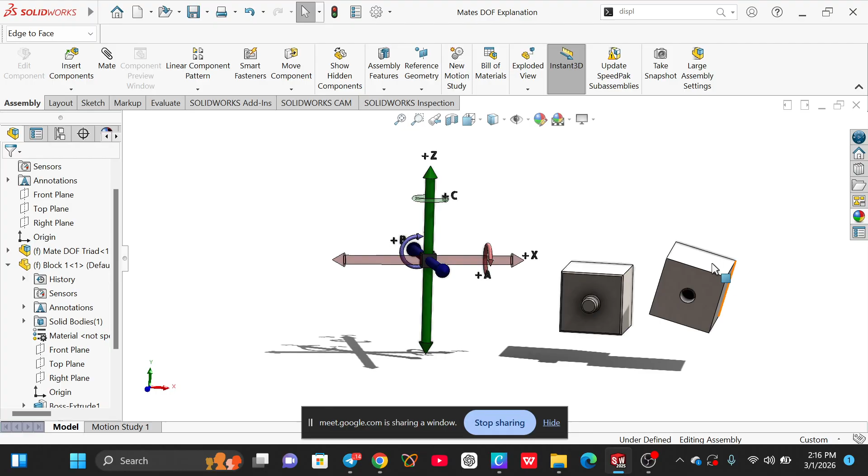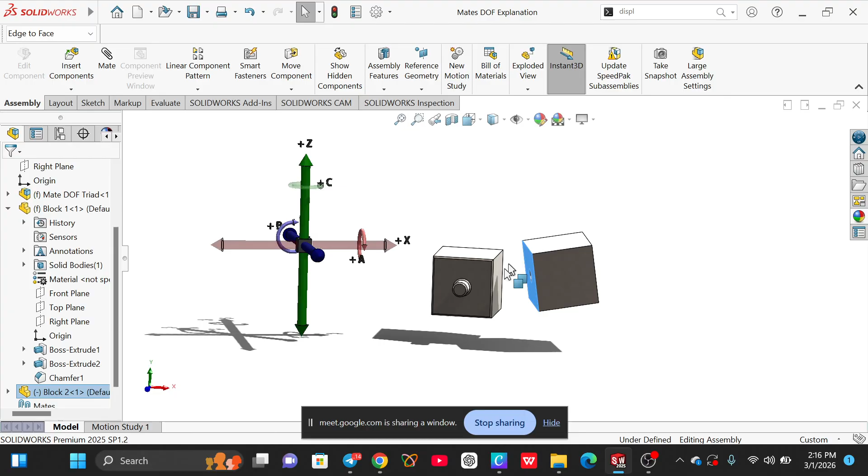Now, as far as mates go, I want you to picture mating as more like real life. So I go to my mates, and I'm just going to briefly explain so we don't take up much time. Like I said, standard mates.

For standard mates, you have coincident — basically joining two faces or two edges together makes it coincident. Then we have parallel, which keeps them at the same line; they all share the same heel or the same angle if it's at angle 90. One of the parent mate and the child mate, one of them turns and now mimics the position of the other. Then we have the perpendicular — basically how perpendicular works is a line should be at angle 90 to the horizontal or vertical line it's being perpendicular to.

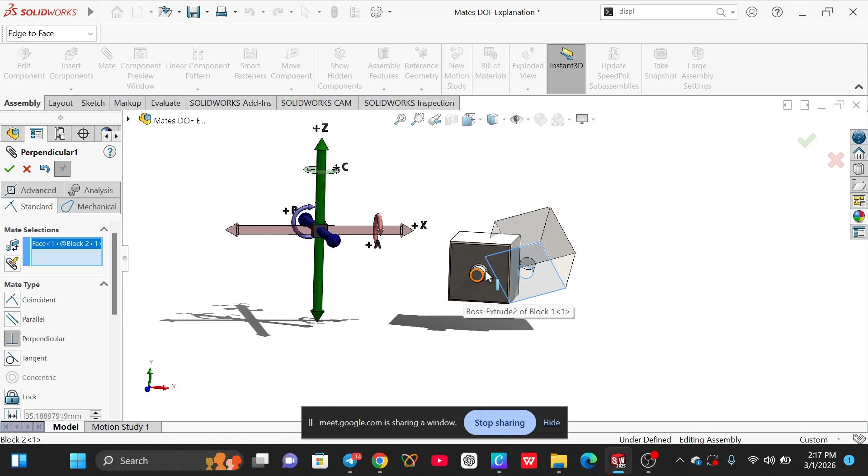Then we have tangents — tangents are for circles and edges, or circle and cylindrical surfaces. That's for tangent. Then concentric is for two cylindrical bodies.

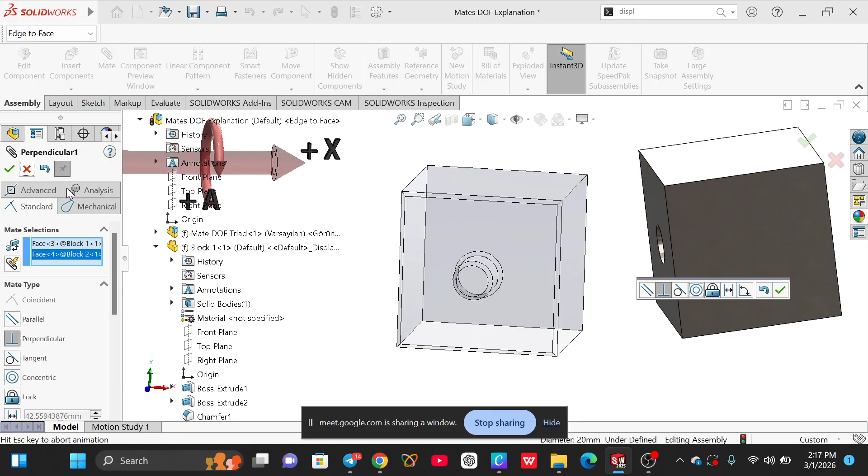So perfect, that's just it. At the base level, there isn't too much to it, because it's a matter of choice — since how you assemble a certain part or product is based on whatever it is being applied to, you have the prerogative to do whatever you want with it. You can use any mating you want, as long as it's logical for that purpose. Okay, then now we move to the advanced mates.

These are basically the relationship between parts — advanced mates are mostly used between parts that are much more complex. Now, for instance, the most popular advanced mating we use out there is the width mating. The width mating is one of those mates that just keeps it in the middle — what it does is work with two parts and keep them at an equal distance.

Then same with symmetrical, but the only difference is that symmetrical works with only planes. So symmetrical basically means you put your object, part, or component in the middle, at an equal distance from a certain plane.

Okay, then we have the path mate. Now, if you've taken the CSWP exam, you'll notice that at the end of the CSWP exams, the robotic arm—yeah, I think that's one of the most useful uses of the pathmate.

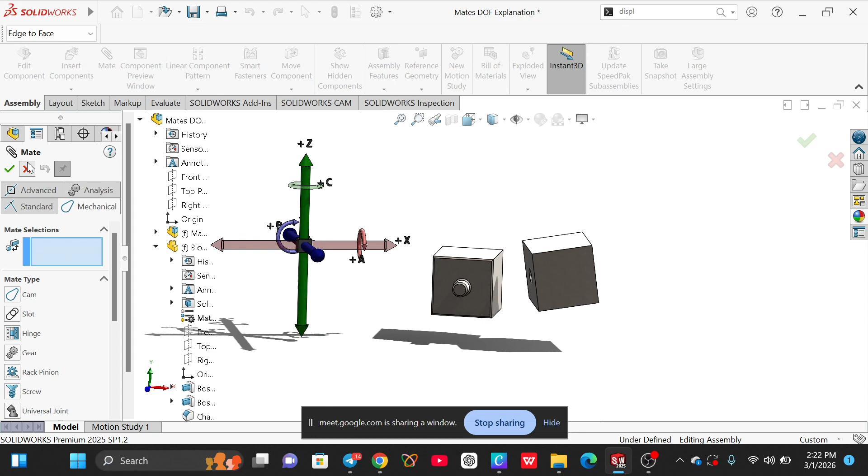So then, lastly, we have the smart mate. Now, when it comes to the smart mate, what it does is this: it anticipates your...

Sorry, give me a minute. Hello, can you hear me, please? Yes, yes, we hear you okay.

Alright, thank you. Now, the smart mate, what it does is this: at the most default level, the smart mate basically anticipates the best possible mating to be used for that said purpose. For instance, you bring two holes together, and the first thing that comes to mind, it ranks it—it's concentric rather than tangent, right? So it basically depends on what it's called, the smart mate. I assume I don't use it much because especially when you want full control of your design.

Then the last one is not really a mate. That's why I said there are four types of mate. So the MateXpert is more like a diagnostic tool—it helps you detect errors, when your design is over constrained or your design is under constrained.

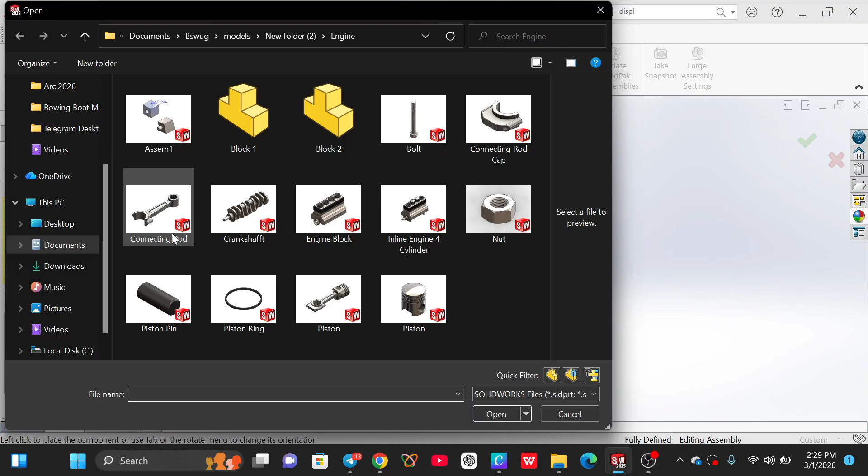So first things first, I insert my component, then browse through my components. Then I select the connecting rod. By default, this is fixed, so I right click and float it. Okay, perfect.

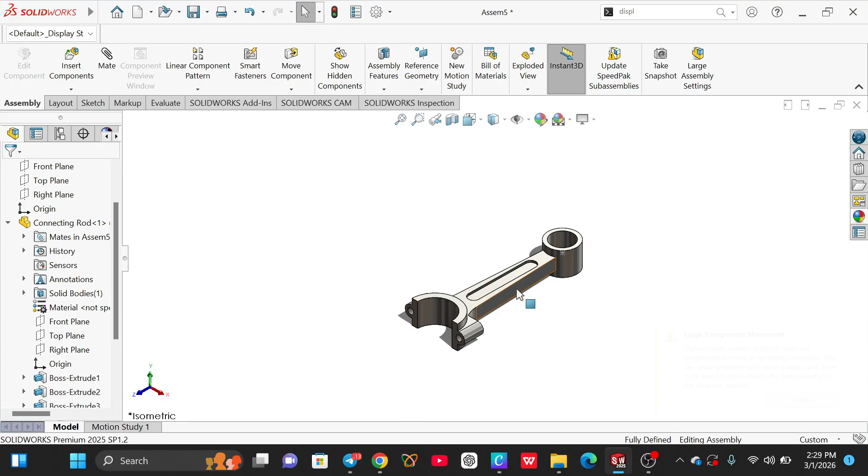Now it's floating. I said let's picture this like a workshop - our design shouldn't just be floating in an empty space. So what I do is make the origin of my design interface and the origin of my first part coincident. Doing this, my front plane or top plane of this part now aligns properly with the top plane and front plane of the assembly canvas.

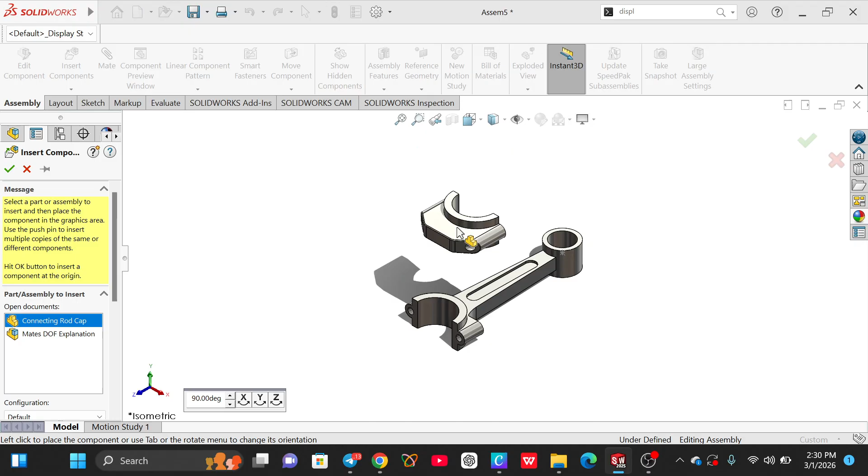Okay, perfect. Then I insert the connecting rod cap. Okay, then easily I take here.

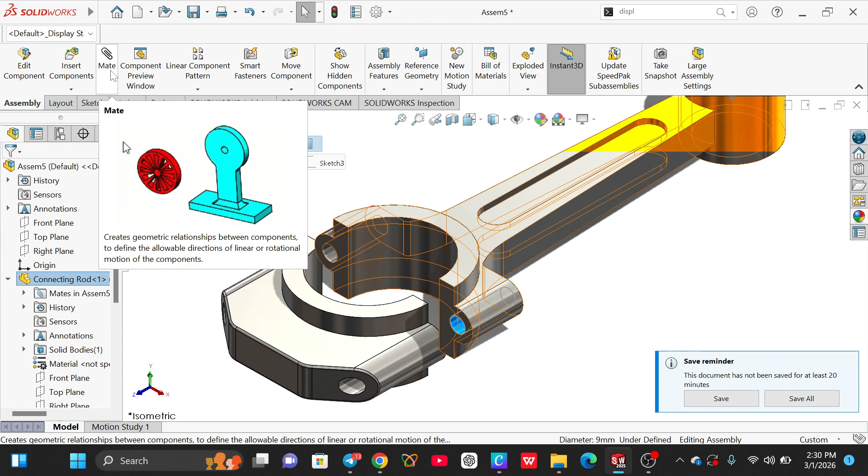Now, what I'm going to do is this - I'm not going to start using mate the normal way because it's going to take a lot of time. I'm going to click the part I want to mate, hold control, then select the second part I want to mate. Then the option for which mate I want to use - if you hover over them, you get to see the options. I think it makes my work much more efficient.

Okay, so here you have parallel, perpendicular, tangent - these are basic, standard mating. Then you now have advanced mating, these two. Good, so I make here concentric. Then I take here and I make here concentric.

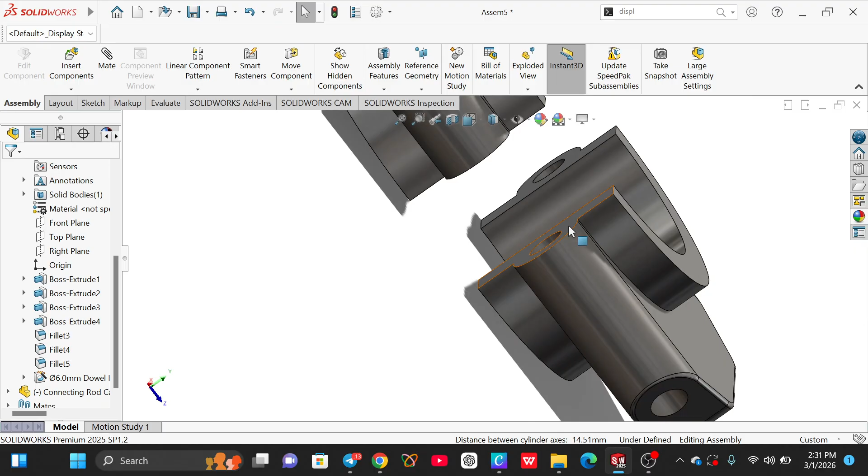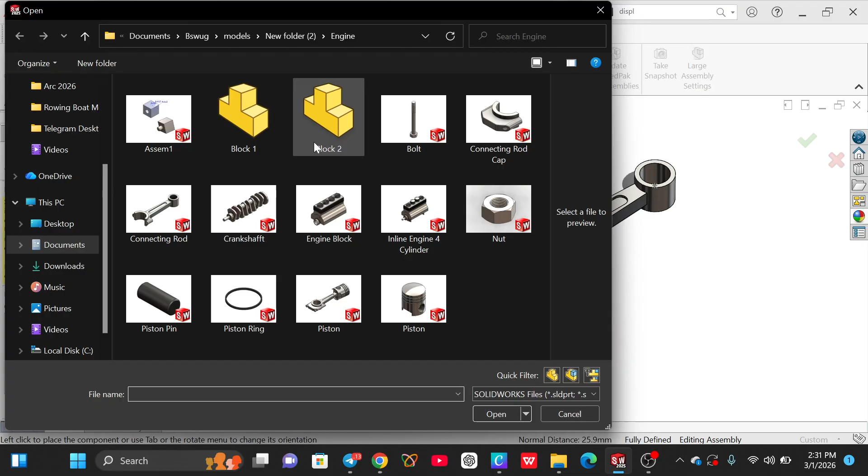Coincident, right? Good. So I insert the part. I insert my bolts, I insert my nuts. I'm selecting them so I can insert multiple components at once. I need the bolts, I need the nuts, then I need my piston, my piston ring, and my piston pin. Okay, so I open them and I start dropping them separately.

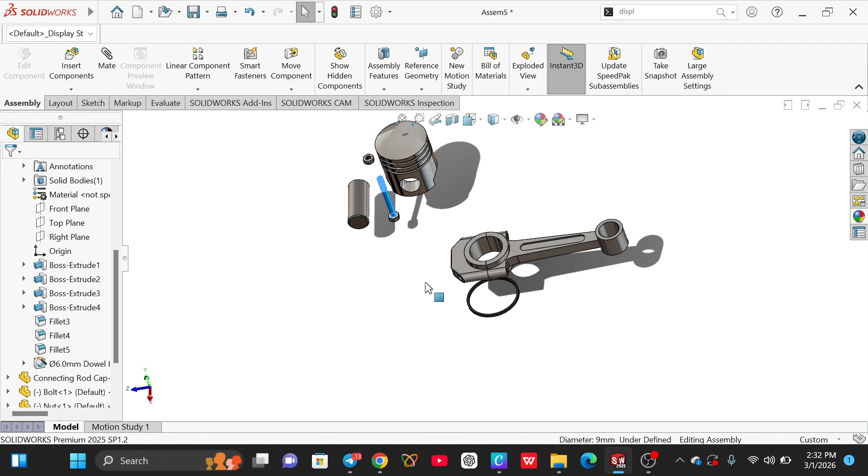Okay, good, perfect. So first things first is here. Okay, perfect. So I'm going to bring the nut closer.

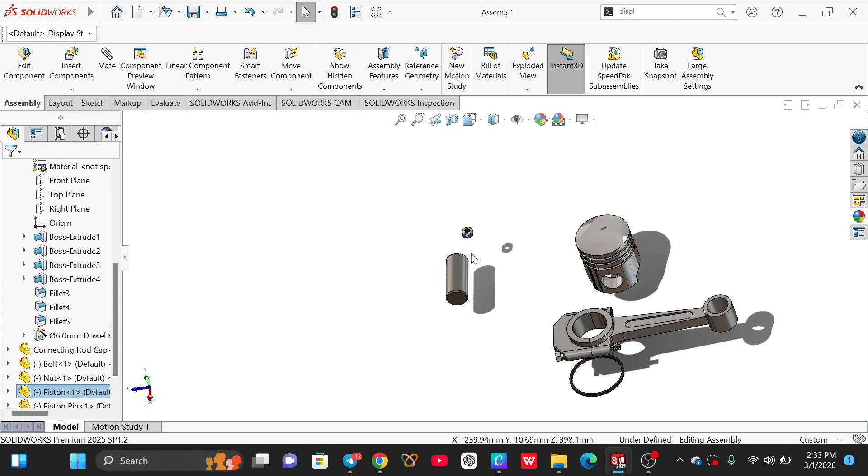Then, okay, first things first, I'm going to use here and here, and give it a distance of 10, right? Good. Then I'm going to apply.

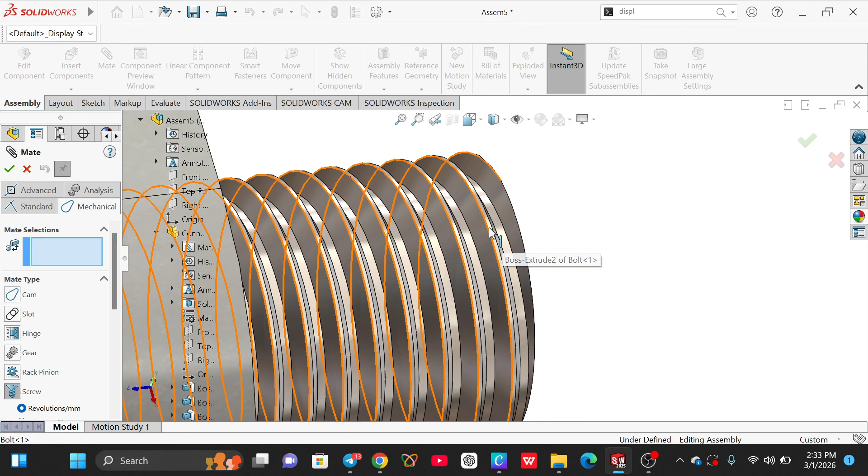Now, why I'm doing this is because I want to apply an advanced mate, right? So I'm going to go to my mate, select mechanical, and I'm going to select screw. So for the screw mate, I'm going to select this face.

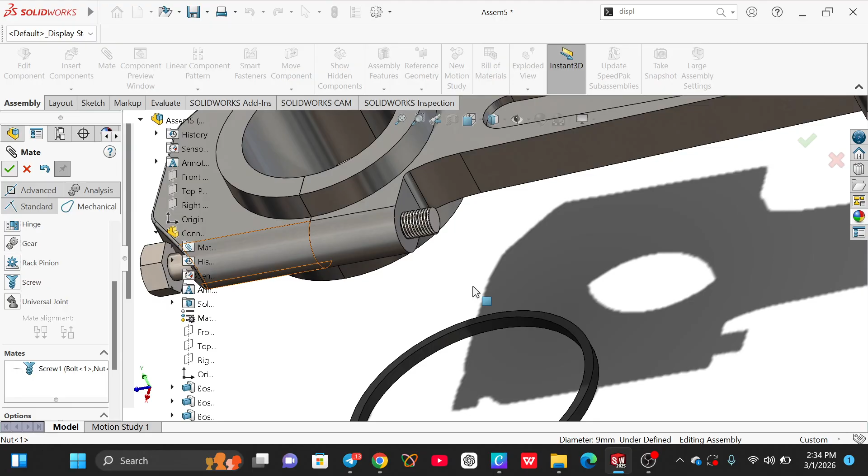Then in the nut, I'm going to select this face. Now it tells you the direction, so you have a whole lot of options, like how many revolutions per distance are covered and all that. So we're just going to leave them at default and say okay. Then I'm going to shift it.

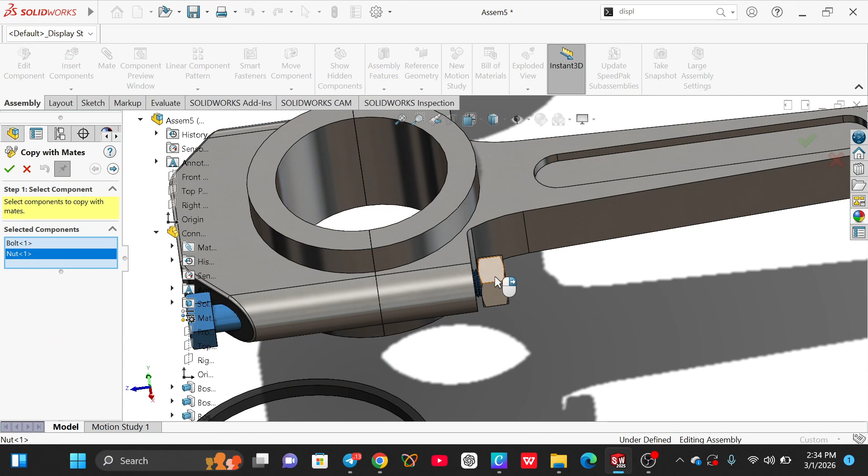Right, good. So before anything else, I'm going to right click this component and copy with mate. Then I'm going to select this set component too. Copy with mate makes your designing process much easier if you've used it before, right? Especially if you don't want to use linear pattern.

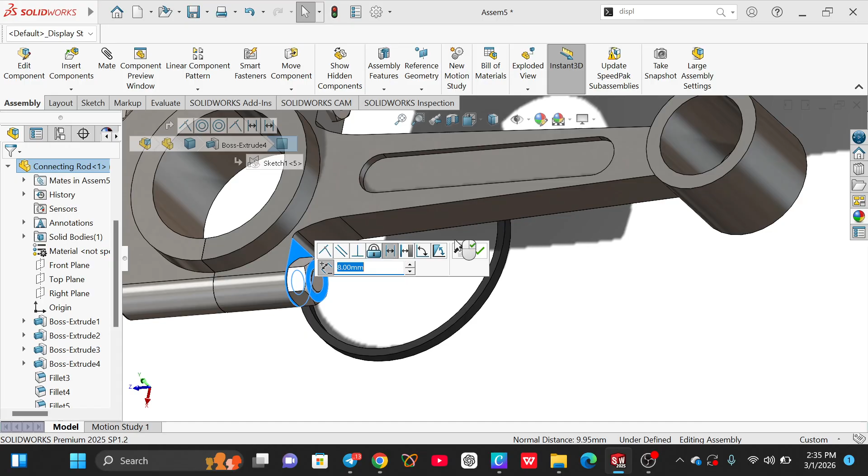Okay, good. Then cancel. So I'm going to make here and here at a distance of 8. Okay, good. Then I'm going to make here and here parallel. Sorry, coincident rather, they're already parallel. I'm going to make them coincident. Okay, good, perfect.

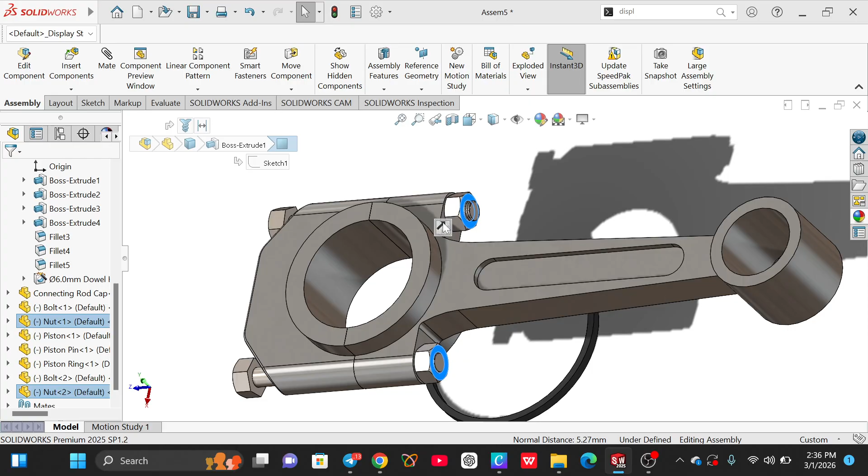Then for the piston, I'm going to add the rings. So if you're a mechanical engineer, I'm adding this ring. I want you to, in the comment section, tell me why as an engineer we need to add this piston ring. Why is this ring important in this internal combustion engine? Okay.

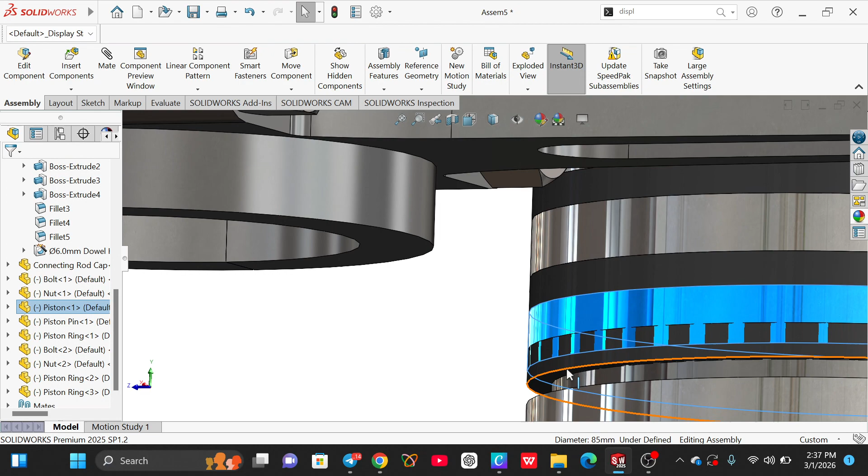Okay, all right, perfect. So all I have to do is take here and make here concentric. Then I'm going to take here, here, and here. And then I'm going to use the width mate and keep it midpoint. Good. Okay.

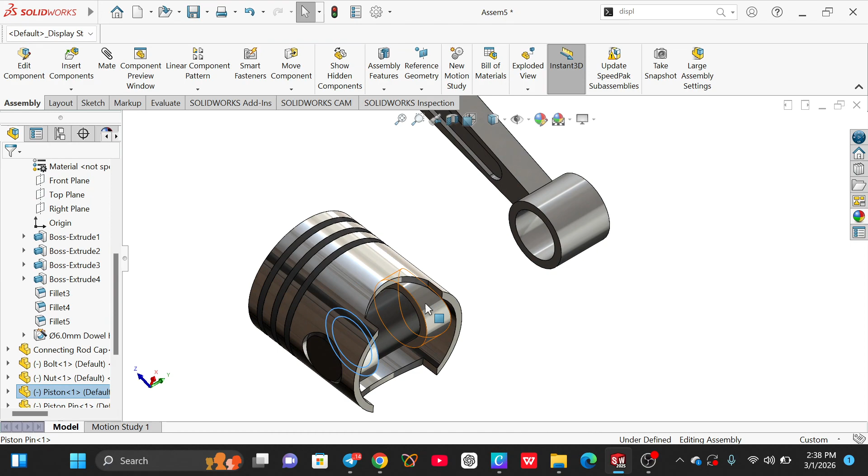I'm going to apply another width mate. Width mate only works with a face, it doesn't work with an edge. So if I were to select an edge instead of a face, it wouldn't work, right?

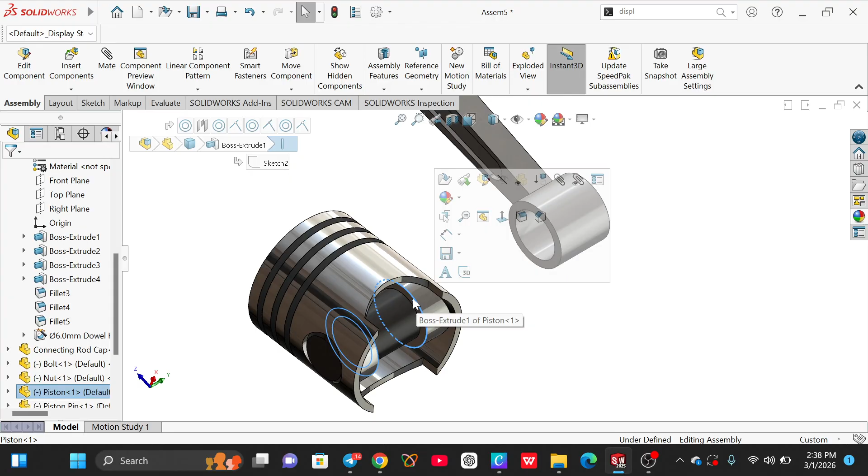Okay. All right, perfect. Now we've assembled the piston.

Okay, so what I'm going to do is save the piston as a separate document, right? I'm going to save it as P. Okay, good. And then I'm going to Control N to open a new assembly.

So now for this assembly, like I said, every single individual workspace you open is a physical workshop, right? Separate on its own. So what we do is start inserting. Let's start with the engine block, since it's the biggest component there. Then you can start with the crankshaft depending on what you want, right? So I've inserted the engine block, okay?

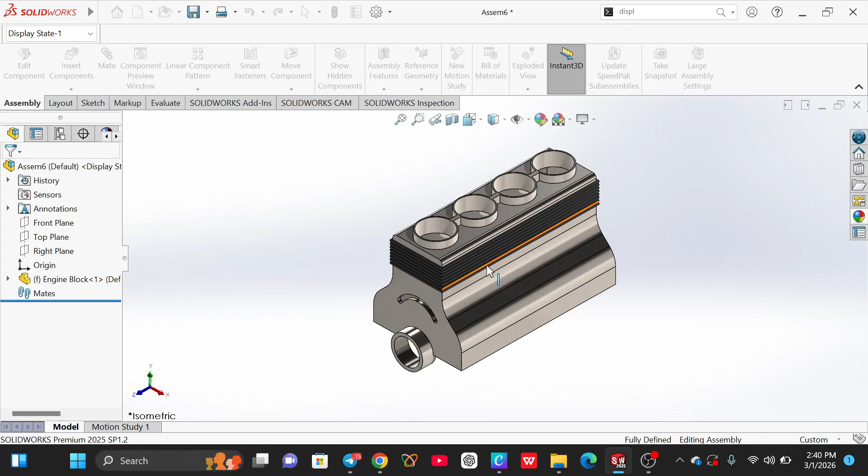Okay, so then of course we know it's going to be fixed, so I'm going to right click and make it float. Then I'm going to constrain its origin with the origin, right? Perfect, good. So then I'm going to insert the crankshaft.

Okay, so I'm going to take here and make here concentric. Good, perfect.

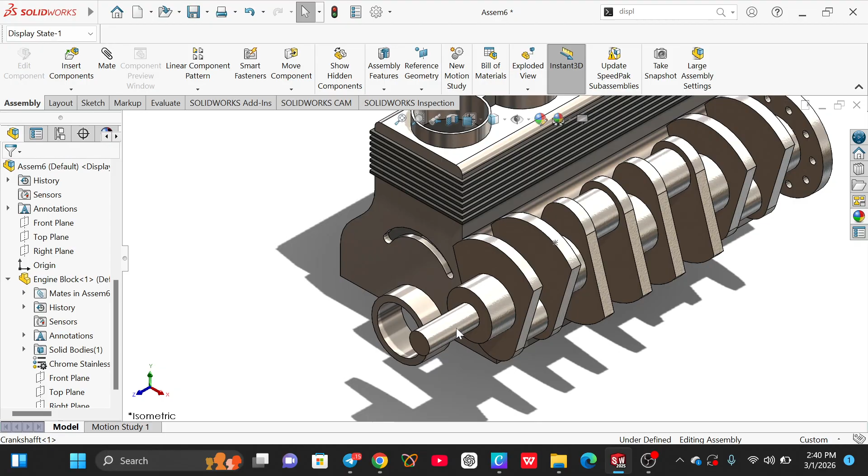Now let me explain something a little bit, we'll talk about it later. This crankshaft, when I first inserted it, had 6 degrees of freedom, floating in space, not moving by default. Then I immediately added the concentric mates, restricting movement on purpose in the x direction. If you look at my triad, you can see I've restricted it from moving this way and this way. But it can still move this way, and it can rotate on its axis.

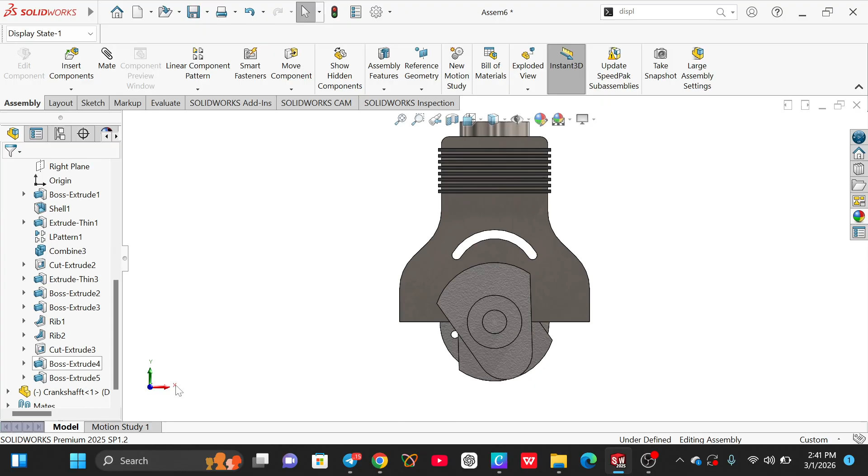Good, so I'm going to insert another component. This time I'm going to insert the assembly we did just now.

Now, key things you should know: if you insert a part into a SolidWorks assembly, the first part is fixed. If you insert a subassembly into SolidWorks, it's not fixed, but it's rigid. Rigid meaning it's not fixed, but any mate applied, especially concentric, which should ordinarily let this part rotate, is fixed instead. So the whole subassembly is rigid until you make it flexible.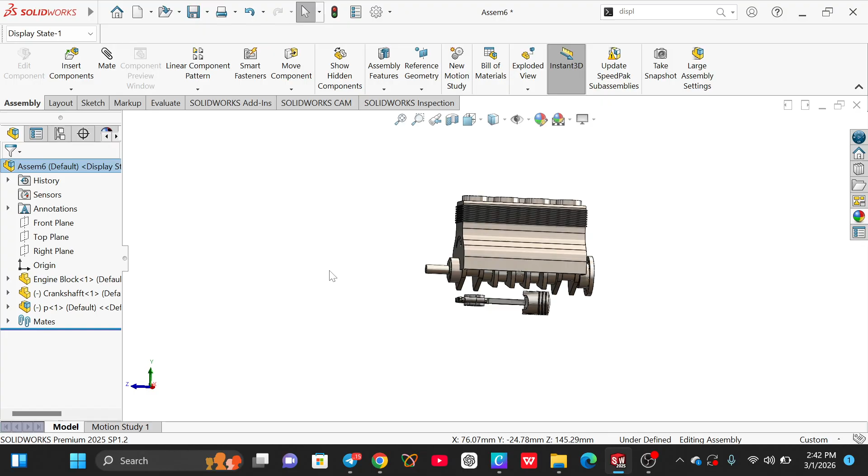The purpose is this: for large assemblies with much more moving parts, when you import, for instance working on a power plant design with multiple subassemblies, and you import a new subassembly with all its mates, this space gets filled up. That's one issue. Also, your rebuild time, especially with designs up to 1,000 or 500 components, begins to take longer. If you make an alteration or modification up in the hierarchy, it takes a lot of time to come back, and most times, if your laptop isn't strong, it ends up crashing.

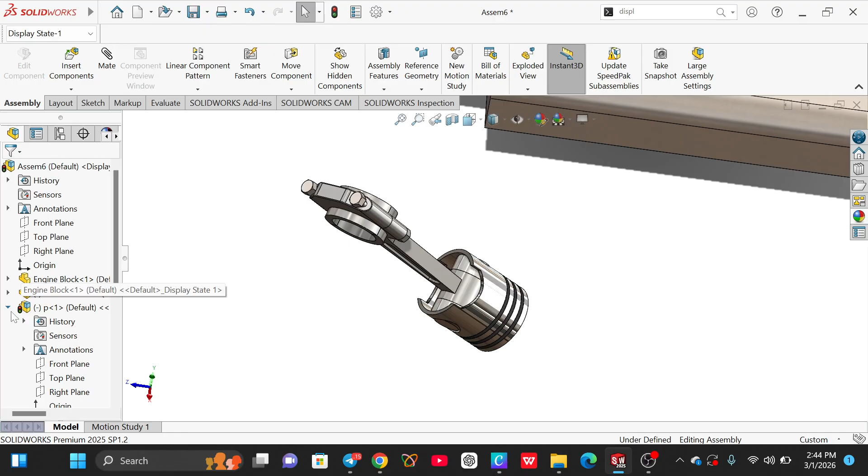So what we are going to do is this: I'm going to right click on the component and make it flexible. When I make it flexible, it loads and these parts can now move freely.

So this is what I'm going to do, I'm going to rotate it. I'm going to make here, and here, and here. I'm going to make them concentric. Good.

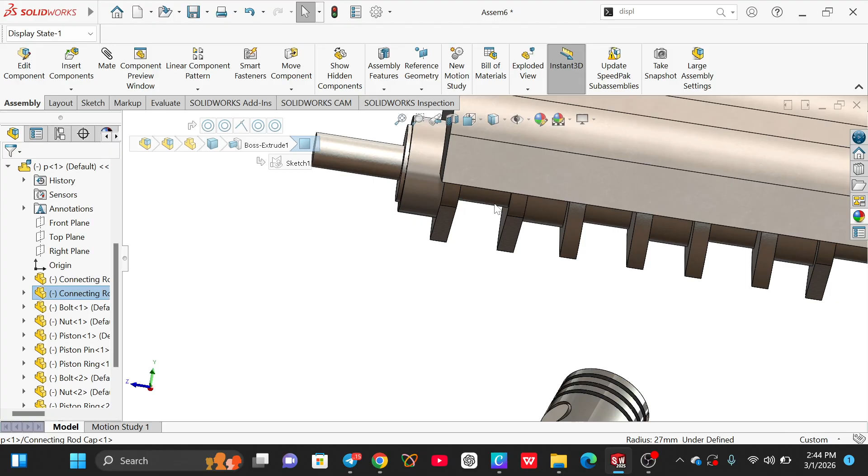Then I'm going to take here and make here and here concentric. Okay, perfect.

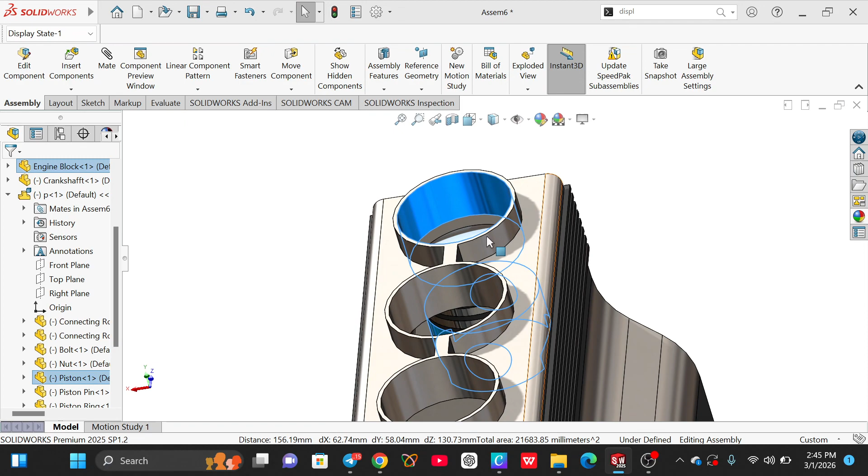So then what I'm going to do is right click and copy with mate. Then I select this place, concentric, and then the second concentric. Then immediately I'm going to make the said subassembly flexible.

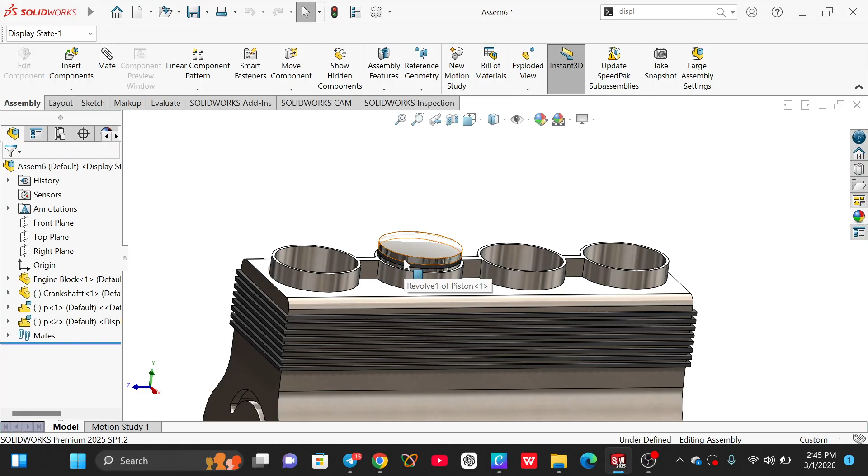So I'm going to do the same thing: right click, copy with mate. Now you can copy with mate, or you can use linear pattern, but using linear pattern you have to know the exact distance between each of these parts, the distance between the center or axis of this cylindrical hole and the next one, and then you can apply a simple linear pattern mate.

Then I'm going to make it flexible again, and then do the last one, and then we're done. I click and copy with mate.

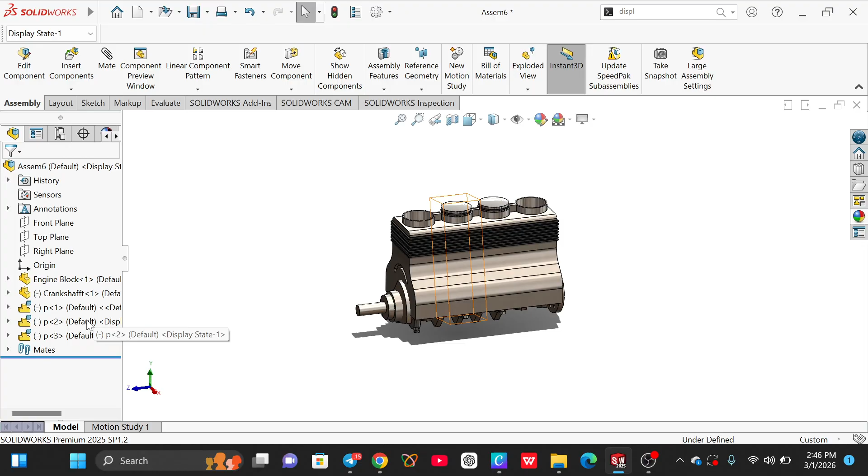Now perfect, but note this part is still not constrained. So what I'm going to do is take this edge and make it coincident. And just like that, our design is fully constrained. Let me see, it's fixed, okay.

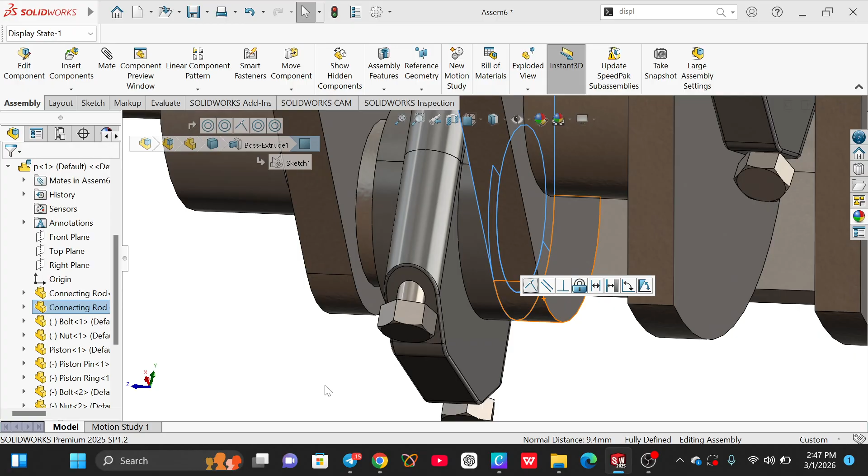Now you should know the whole assembly process, like I said, mimics real life. Once our assembly is real, the next logical question is, does it actually move the way it's intended to? We see the motion study. So this is where motion study comes in.

SolidWorks provides 3 levels of motion study. The first is animation, available in core SolidWorks, great for creating simple turntable animations or exploding views. The second is basic motion, also available in core SolidWorks, which allows you to approximate the effect of motors, springs, and gravity for visualization purposes. But to truly simulate and analyze the real-world physics of your mechanism, including force, friction, and damper, this is the realm of motion analysis, available with SolidWorks Motion and in SolidWorks Premium.

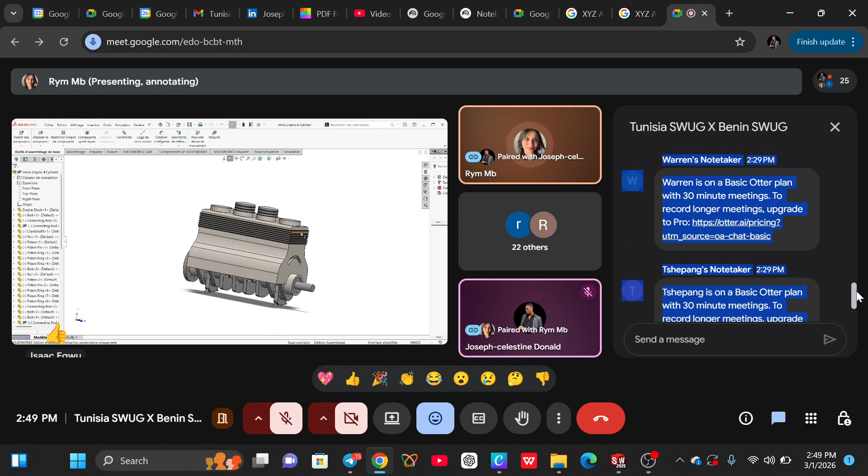So here's our assembly. Just go to motion study here, and we must choose our motor. For the motor, we should define 3 things: the first is the emplacement of the motor, the second is the direction, and the third is the motor itself.

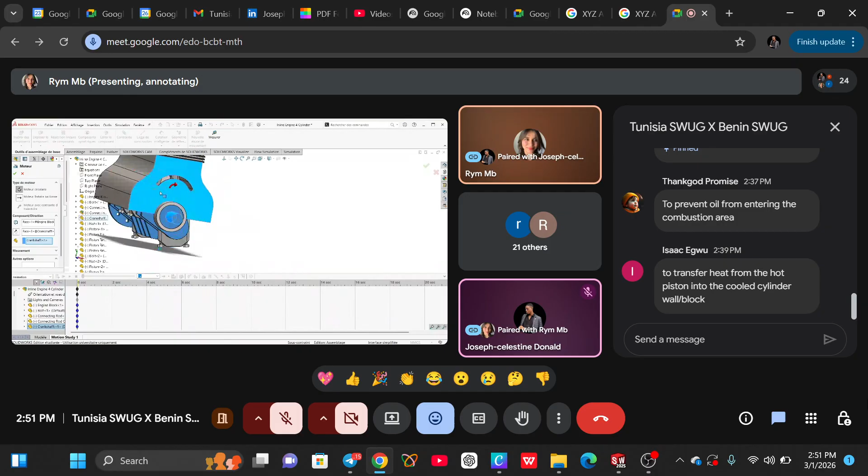We choose the crankshaft as the motor because it's the part that has the movement. We use the crankshaft as the motor for the direction. The face of entry is the direction and the emplacement. As you can see, this is our motor, the crankshaft, because it has the rotational movement. Here is the emplacement of the motor, because the crankshaft is in the block motor, and here is our direction. So after we confirm the motor...

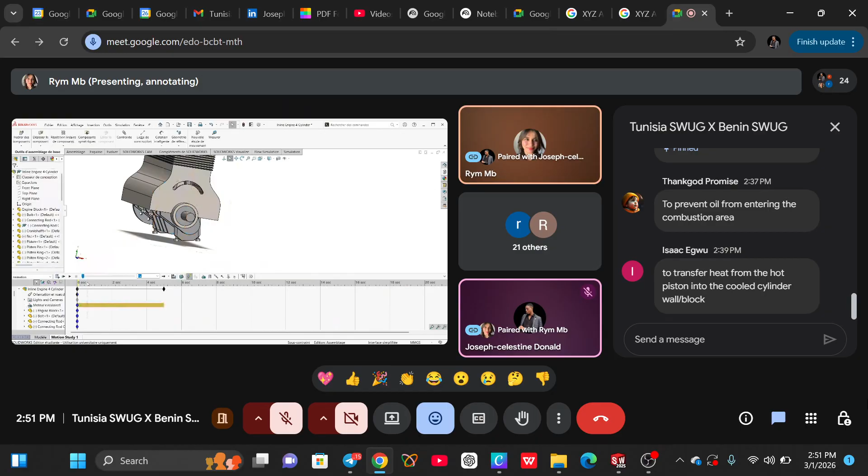We play our animation. As you can see here, our movement. It's clear, the internal combustion engine works perfectly. You can repeat it. The piston moves up and down, like we see.

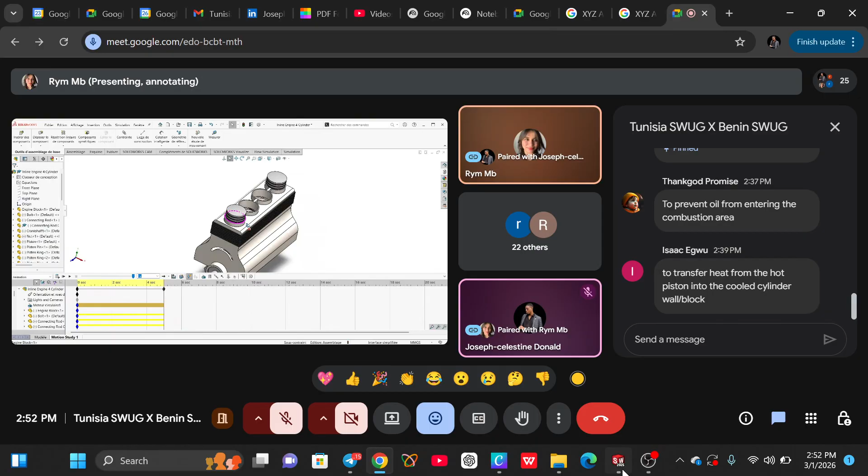We can control the type of animation, speed or slow.

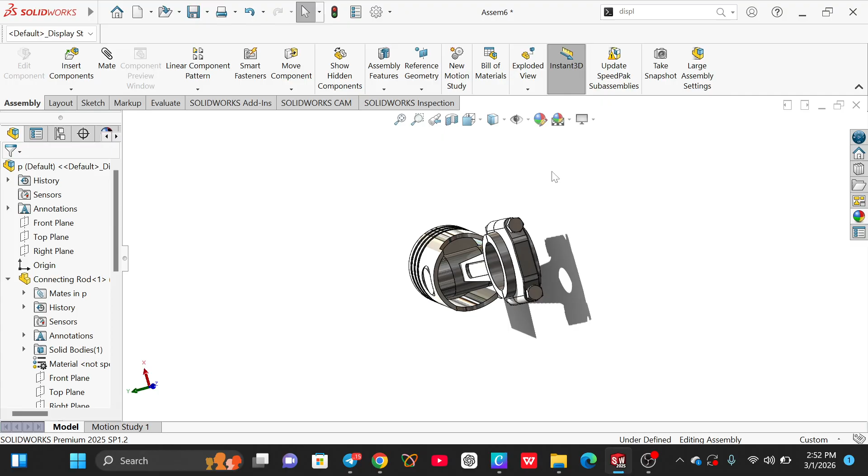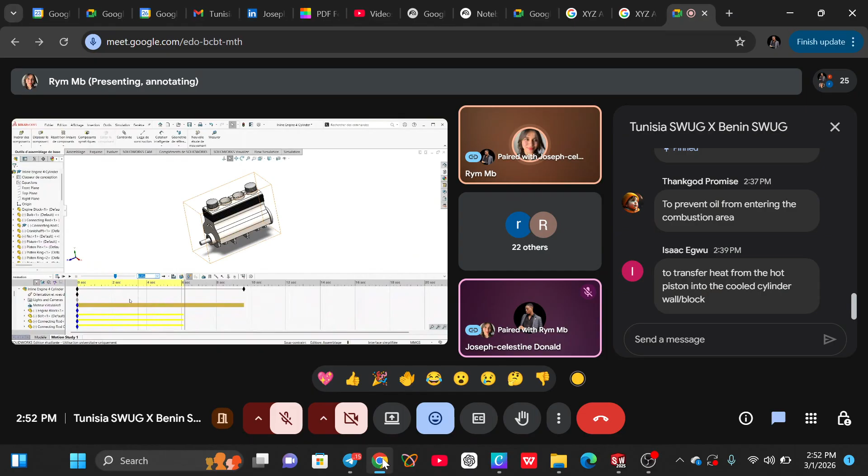To understand this mechanism, the system: when the internal combustion engine works perfectly, the piston moves up and down, like we see. The cylinder converts the fuel into mechanical energy, and the crankshaft rotates smoothly. I hope this is clear.

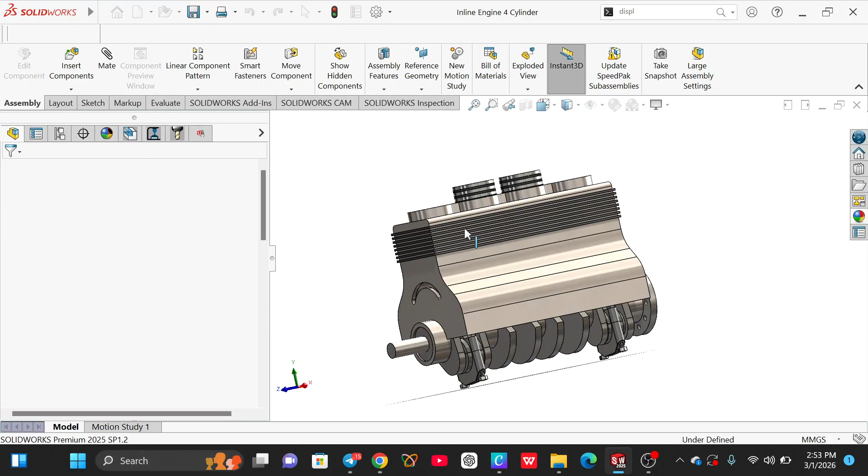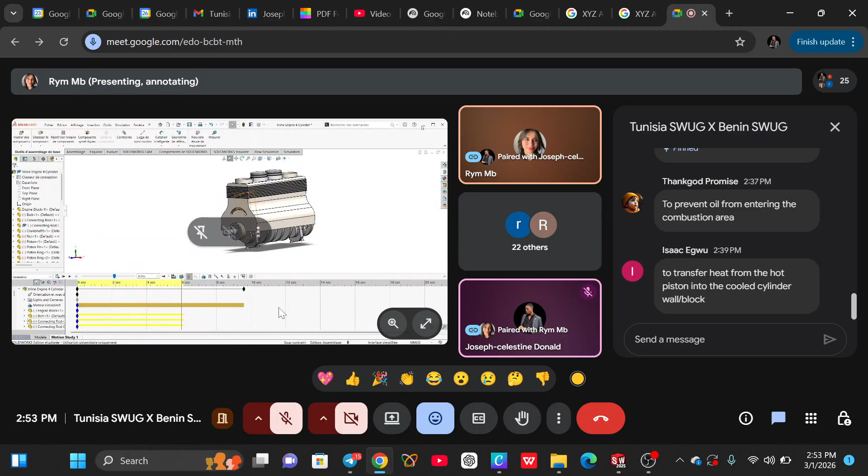Any question? So we will go back to our presentation.

So now, to be an engineer, right, we should avoid just being on the creative side whilst neglecting the most important and fundamental parts of being an engineer. Now it's okay.

To my question, both got it right actually, but the primary purpose of the ring is to seal off the combustion engine, because it uses lubricating oil. So if it's not properly sealed, smoke escapes from the combustion chamber down into the oil, and then it contaminates it - that's the situation where you now start having black oil.

Okay, nice one. Now it's very important to understand degrees of freedom. For these degrees of freedom, so we understand it properly and in a much simpler way without all the technical jargon, I'm going to explain it in a simple manner.

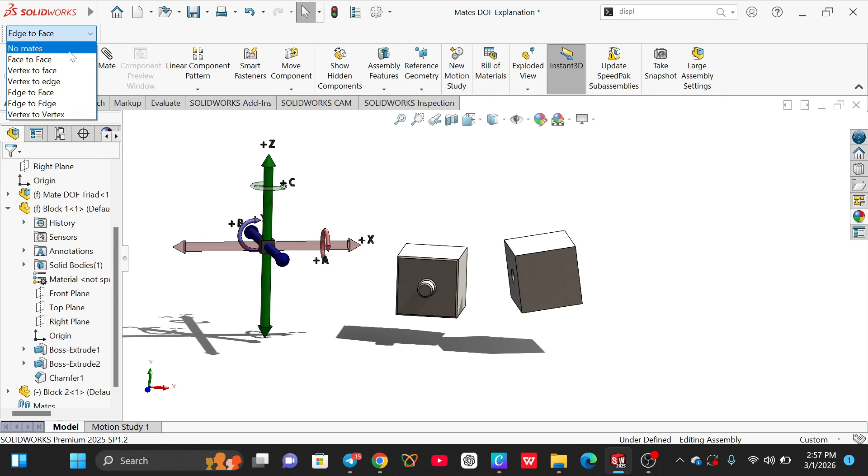Now let me explain. We'll take 6 cases. The first case is when there is no mate applied in between these two objects. So basically, this object in question has all complete 6 degrees of freedom.

So basically, it has its up and down motion, it has its x motion, and then its y axis motion. Then it has its axial rotation on each axis, right? Complete. So basically, it has all 6 degrees of freedom.

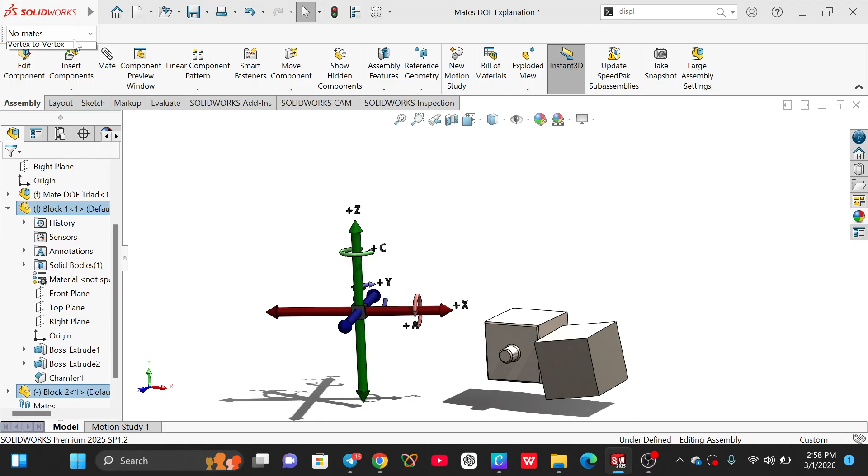Now let's take an instance where we mate an edge to a face. When we mate an edge to a face, what do we end up having? We end up having only 1 degree of freedom removed, and then 5 of them remain.

Okay, sorry, no, that's not edge mate to face. Sorry. Edge to face removes 2 degrees of freedom and leaves 4. All right, so it's easy to explain now.

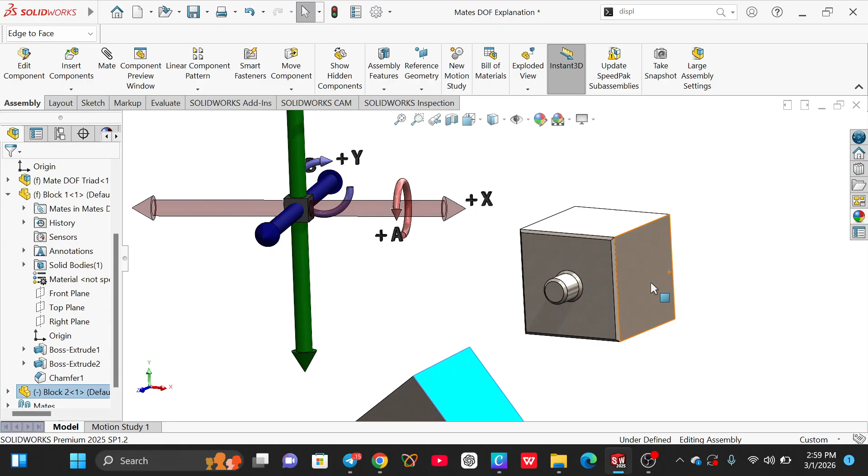Using this diagram, the rotational movement about this C axis is not possible with this object. And the translational motion between the X axis here and here is not possible. If I make it normal, the motion between this axis and this axis here is not possible anymore. So basically we only restrict 2 degrees of freedom, and we are left with 4 degrees of freedom, right? Good. Let's try another case.

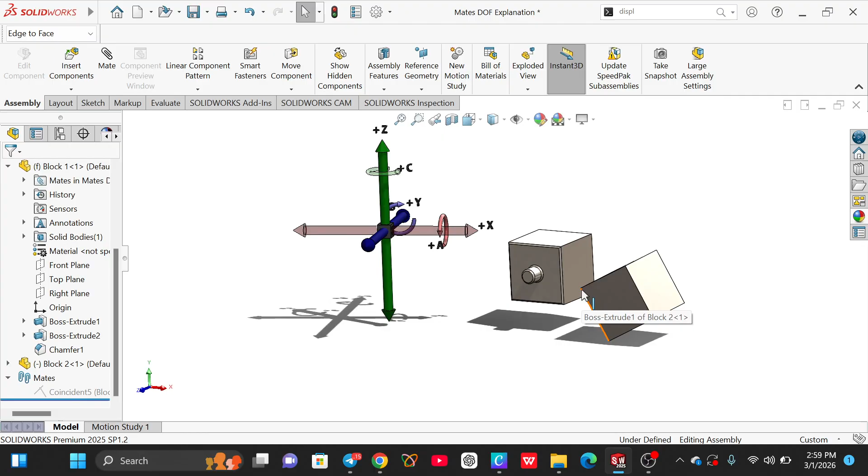I'm going to suppress this. Let's try vertex with face mating. Okay, this is fixed, and a vertex is where lines intersect. So I'm going to take this vertex and mate it to this face. I'm going to make that coincident.

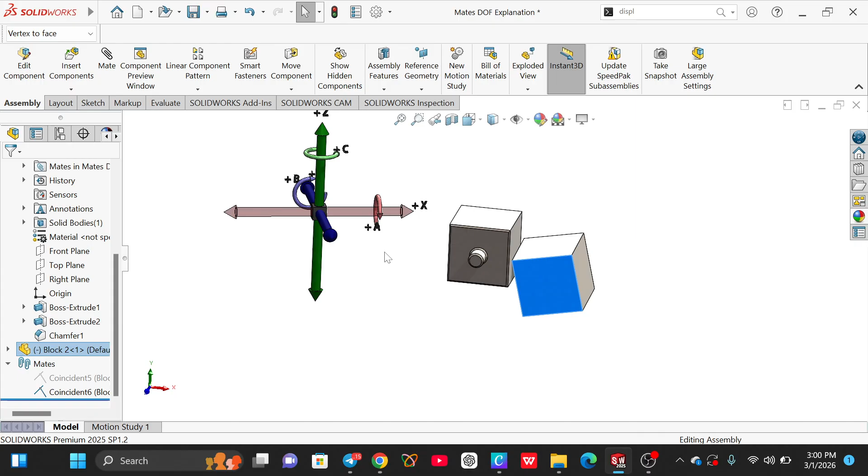Now with the vertex and face mate, only 1 degree of freedom is restricted. Everything else is allowed. Only the movement between this direction and this direction is restricted, between the vertex and this direction. Everything else - rotating on this axis, moving up and down, moving this way and this way - is allowed.

So they are all allowed, only this motion is restricted. Good. Now let's do vertex to vertex - actually, let's do vertex to edge first. This vertex to this edge. Make coincident.

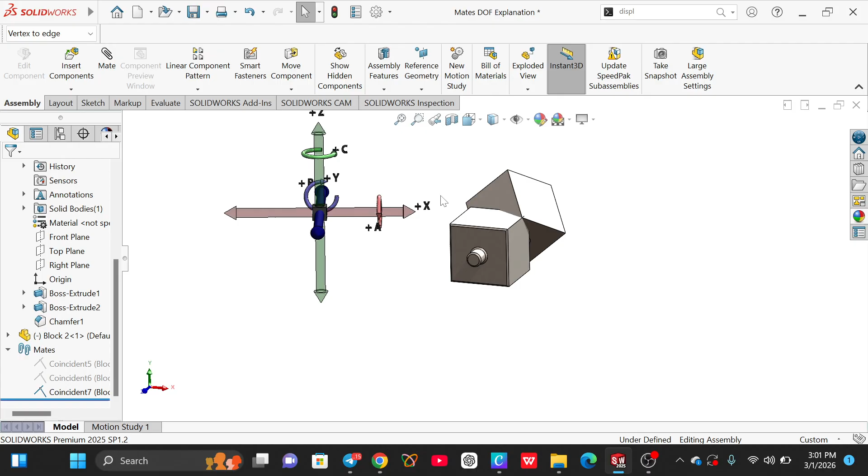Perfect. Now for vertex to edge, you end up having 2 degrees of freedom removed. If you notice, irrespective of which is being removed, it doesn't really matter the amount removed - you notice the motion being removed quite varies. So for this edge, you can't move it up and down - the z motion is restricted, and the x motion is restricted.

Good. We've done vertex to edge motion. Okay, now let's do vertex to vertex. Vertex to vertex would be this edge and then this edge - you can pick any edge you want.

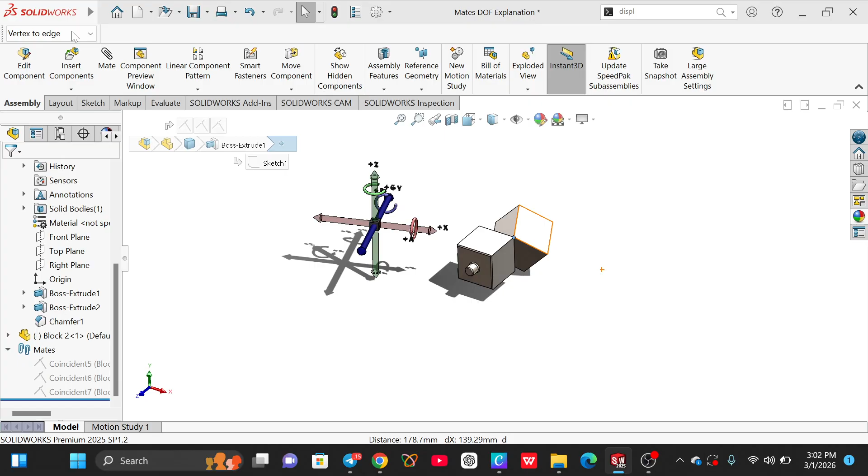Now with the vertex to vertex selection, you see that we lose 3 degrees of freedom. We remain with only 3 degrees of freedom. We lose all translational motion, and we are left with all 3 rotational. So basically it doesn't move up and down, but it can actually rotate on its axis.

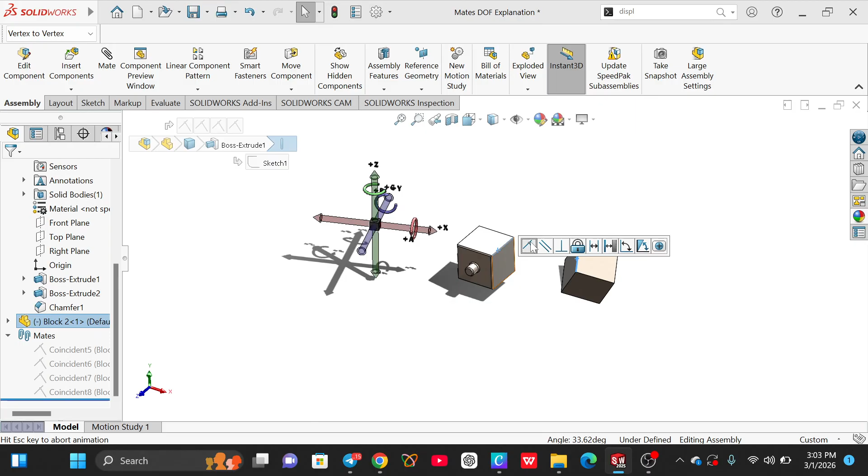Perfect. Now let's try edge to edge. For edge, I select this edge and I select this edge. Now for edge to edge, you notice we are left with only 2 degrees of freedom - 4 of them become constrained. We lose 4 degrees of freedom and are left with only 2.

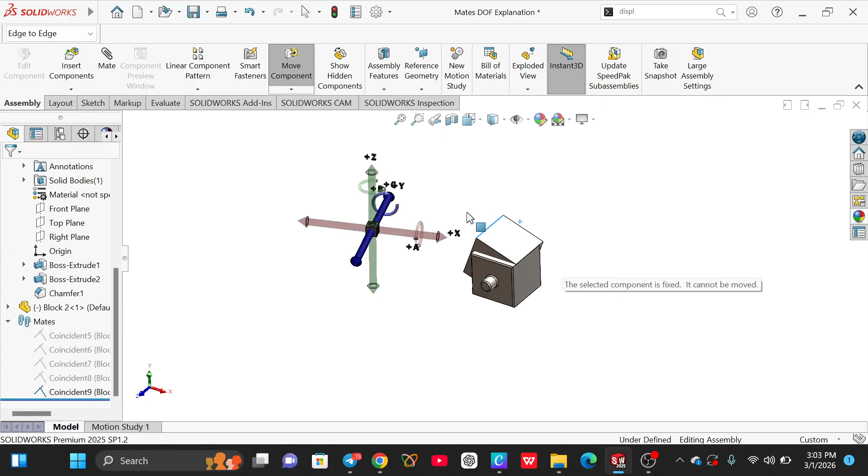We're only left with moving here and rotating around the same axis - only here and here, rotating about its axis. We lost the rest of the motion. So this brings to mind the idea that whatever you're applying your mating into should be done with purpose. For me, I think this is the clearest representation of this.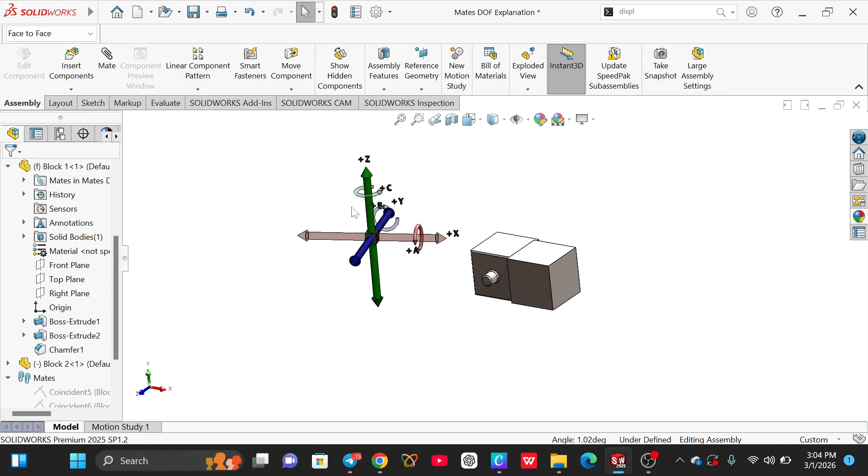Then let's try the last one, face to face mates. I take this face and this face and make them coincident. Now for face to face, we only lose 3 degrees of freedom and 3 are left - we lose 2 rotational motions and 1 translational motion.

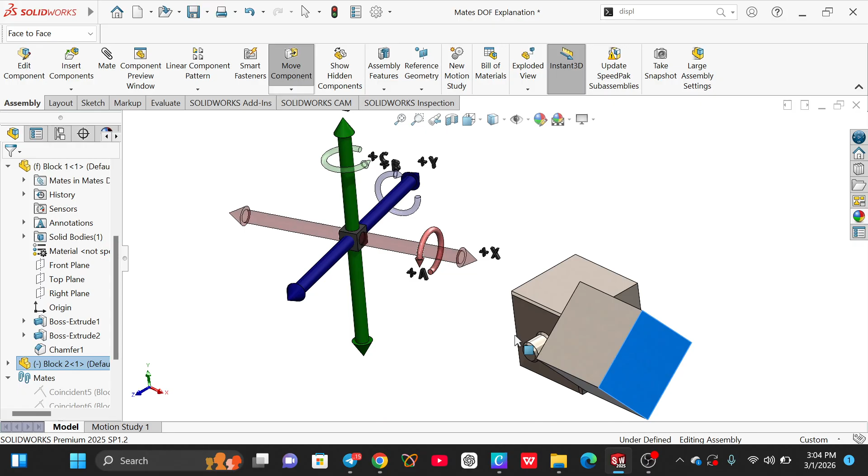So you can move here up and down, we can move up and down, we can move here and here, but it can't go towards the x-axis, and then you obviously cannot rotate. You can rotate towards the x-axis, but you cannot rotate towards the z-axis or the y-axis.

Okay, so now with this, I think this is the perfect representation of degree of freedom as far as it goes. Now, degree of freedom plays an important role, especially if you're working with robotics, right, it's quite important to understand the fundamentals of what you're doing. So if you are now applying motion study to your design, it becomes much more easier.

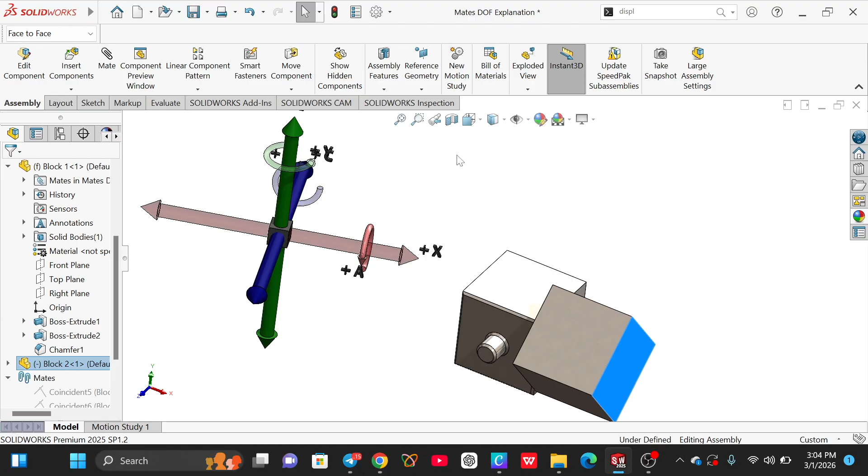Now, for example, let's check how many degrees of freedom we have in this system we assembled. First things first is to make sure it's actually working properly, right? As you would expect it to go.

So I'm going to create a new motion study. Watch carefully. I'm going to keep it at a default. Let's keep it here, right?

Then also another explanation for motion study, right? Motion study in terms of creativity in SolidWorks after visualization. I think motion study comes first before visualization because a design might be good, yes, but as an engineer, you should be able to present your work in a way that non-engineers should be able to understand. You can explain to me the working principles of a four-cylinder internal combustion engine, and I will understand perfectly everything you mean. I would even want to chip in, right? Because I'm an engineer, okay?

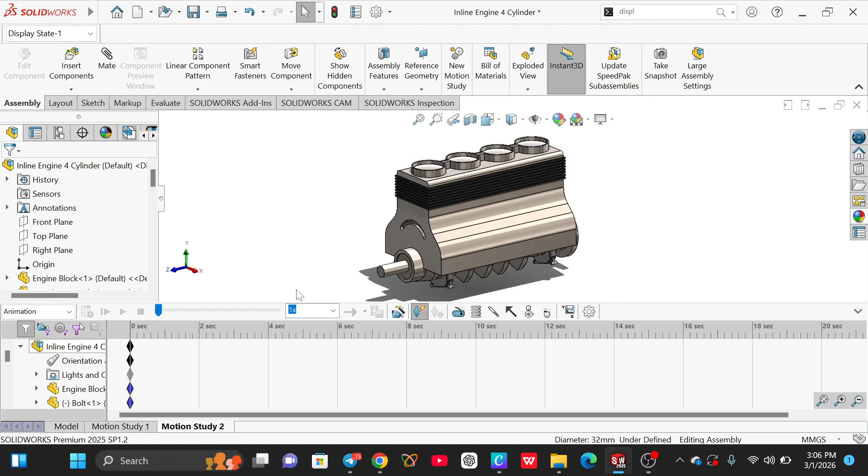But then if you're trying to actually pitch to businessmen, CEOs, people that are not really engineering inclined, we now have the true motion study where we can now simplify the explanation, but also increase its technicality. More like making it easy for the layman to understand.

So what I'm going to do is this. First things first, since we're making real life, I'm going to add my gravity. I'm going to look for - now if you notice edge, notice at the edge, I've not selected any direction. I'm going to look for a direction that points downwards, not the face, an edge. Now my gravity is pointing downwards as it should.

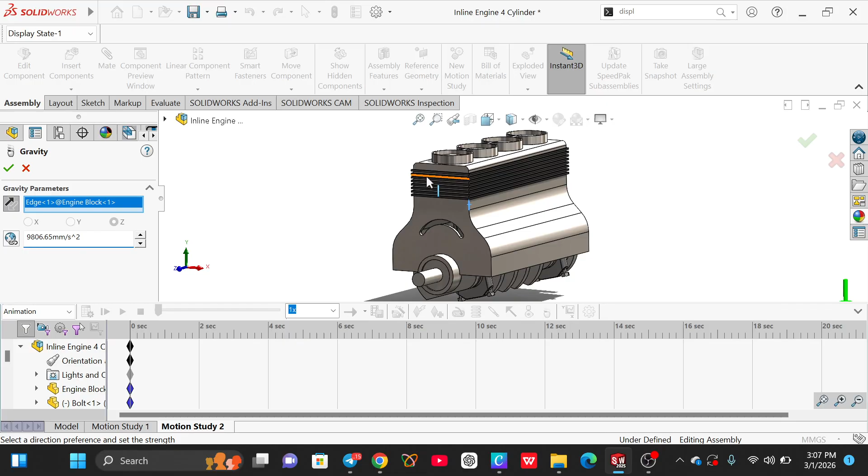And then the value for gravity is constant. It's universal. You notice it's a global variable, 9.81 or 9,806, right? Good. I'm going to say okay. And then I'm not going to do anything else. I'm just going to change from animation to motion analysis, right? And then I'm just going to calculate.

And I'm going to let it calculate. So now what I'm going to do is this now.

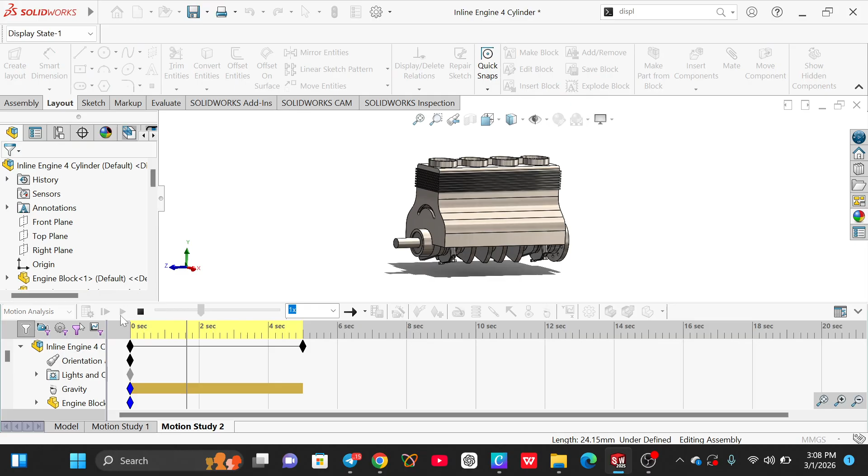Then to calculate the degrees of freedom, wait, give me a second. Supply, excuse me, okay, then let me see. Right click on my mates, and then I have degrees of freedom.

So this dialog box now tells you in your whole system, it gives you proper details. Now you don't worry about the global count. The global count is basically an equation. It's just there, more like if you're working with simulation, your Navier-Stokes equation, it's more like the governing equation used to calculate the degree of freedom, an approximate degree of freedom.

It tells you in this inline engine, internal engine, we have 46 moving parts. It tells you we have 53 cylindrical joints, and then we have 32 planar joints, right? And then it all calculates and gives you the total actual degree of freedom, which is 91.

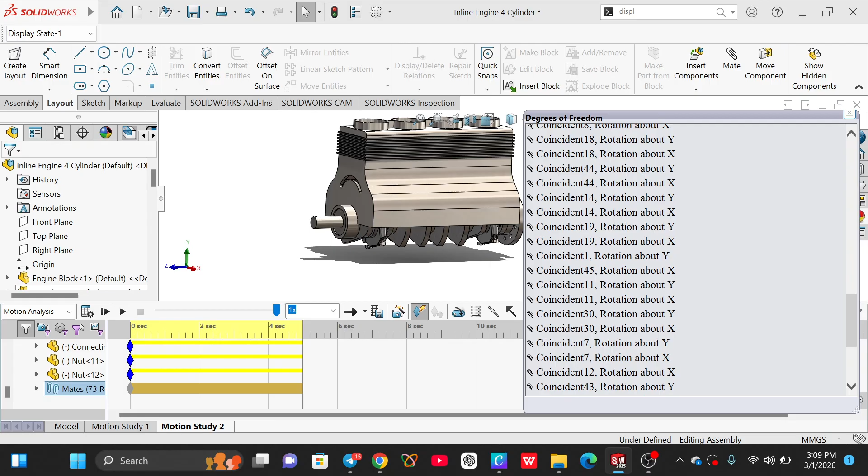Okay, so at the end of the day, right? At the end of the day, you should be able to understand how your design actually translates to real life. Now, for let's say, okay, I'm going to stop sharing my screen now.

Okay, now for marine engineering, there are quite important factors when it comes to actual building. Now for instance, degree of freedom plays a pretty important role in this selection.

For instance, the marine environment is a high risk environment, right? That is to say, anything goes wrong, lives are lost. Okay, that's normal. Good. Now, if you build an engine without the proper understanding of the degrees of freedom of that engine as pertaining its internals and then its environment, right?

You then stand the risk of having excessive vibration, which, if you know vibration resonance, is where the vibration of your machineries and the engine all sync together, and then it causes a breakdown where your actual vessels start having issues. At the end of the day, these play important roles in real life. This is just one single example.

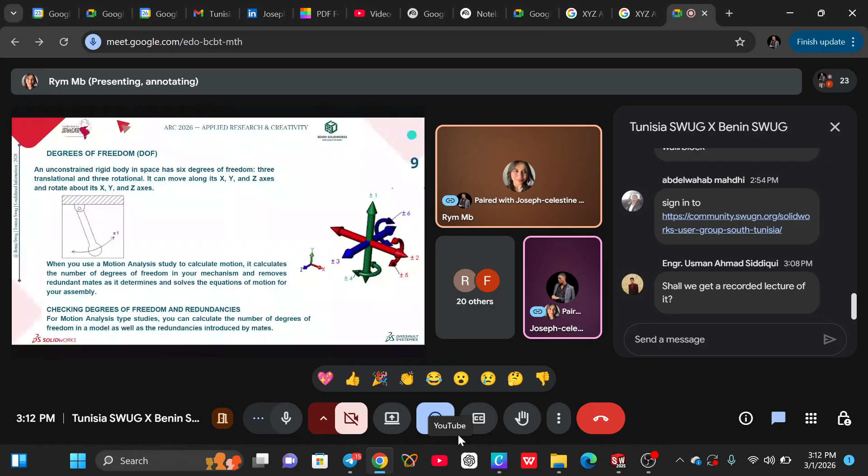Okay, then I'm going to be brief about the toolbox and the standard parts. I'm just going to say that it is important to understand the core concepts behind designing.

The purpose of you designing, you're not just designing for designing's sake. You're designing for manufacturability, ease of maintenance, and you're designing with the intent that somebody is going to actually manufacture this.

So you now have two options: either you're designing to be creative, which I do most of the times. These are designs that wouldn't necessarily translate into real life - they are imaginative designs. You just build without checking stuff like measurements, the mass, the surface area, the volume and all that. Or there is actual designing where certain parts have to be built to standard.

Right, now where SolidWorks helps is this. For most of, I've been freelancing for a while now, most of the designs I do has to be manufactured.

If we have components, let's take an example. I was working on a silos design, and this silos design needed about 200 bolts because it was layer upon layer. So we needed bolts to go in, and most of the bolts we had about 25 of them separate, with little variations. These were bolts that should be able to get from the market easily.